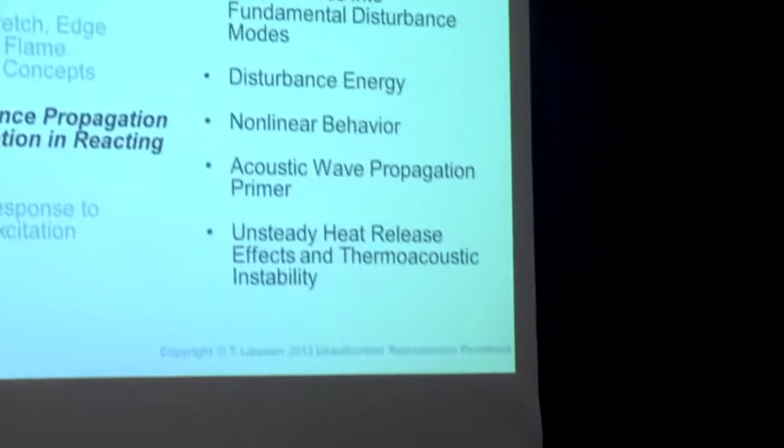But anyway, I should have put this slide up earlier. We're talking about disturbance propagation and generation in reacting flows, and then we'll finish by talking about how flames respond to these disturbances—in particular, how flames respond to harmonic disturbances.

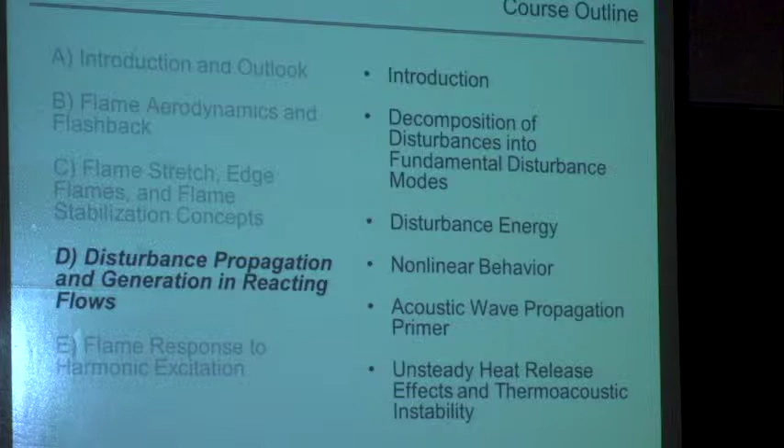This is an interesting topic because everyone here who's taken a turbulent combustion class has thought about how flames respond to disturbances. In that case, you've looked at how the time-averaged burning rate or time-averaged flame position changes when the flame is disturbed by Navier-Stokes turbulence. That's in essence the turbulent combustion problem: what's the response of the time-averaged burning rate to the amplitude of turbulence intensity.

But what I'll show you is that when you harmonically excite a flame, which is also a very important problem, the way the flame responds is quite different than if you excite it with stochastic disturbances.

In particular, some of you may remember the concept of ergodicity. If you have an ergodic time series, time averages and ensemble averages are equivalent. So if you take a time average, or repeat an experiment many times and average at a given time across trials, you get the same answer—which is true for turbulent disturbances. In contrast, when you have a harmonic disturbance, those are not ergodic, so time averages and ensemble averages aren't the same. That has significant influences on how the flame responds to harmonic disturbances.

So let's get started here, with an introduction. I'm going to motivate some of the problems we'll be looking at.

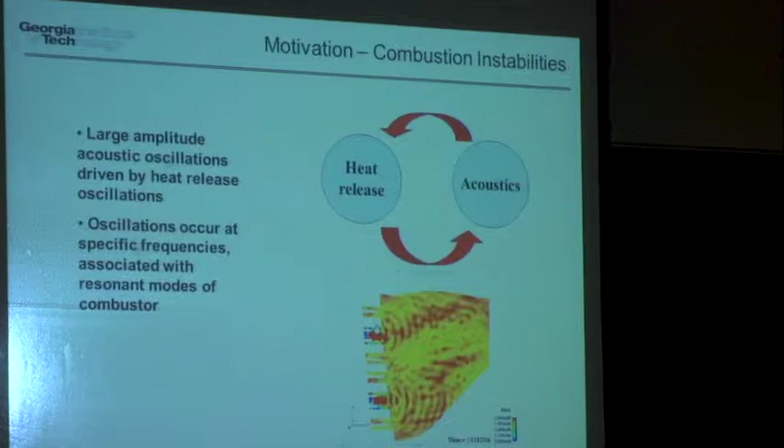One of the big motivations is the problem of thermoacoustic oscillations or combustion instabilities, illustrated schematically here. The idea is that if you take a flame, which is a source of heat release, and disturb that source, the flame responds—it doesn't just sit there. It moves around, and you get disturbances in how reactants are converted into products and so forth.

When you take that heat release and place it inside an environment which gives feedback—namely a combustor—you create the possibility to close the loop. The bottom half of this loop is always happening, and when you place the flame inside a resonator, the top happens too. You may remember on Monday I asked: what's the difference between a premixed and a non-premixed combustor?

Well, a combustor used in premixed applications is an organ pipe, whereas the combustor used for non-premixed applications is a muffler. And so the degree of this feedback changes dramatically, and that's one of the reasons why, as combustion designs have continuously evolved towards more and more pre-mixed, and you need all that air in order to get the low equivalence ratios for low NOx, what has inadvertently happened is that combustion designs have lost all their acoustic damping. They've gone from being mufflers to being organ pipes.

But what happens is this feedback loop occurs at a very specific frequency. So the feedback time scale is usually moderated by the natural acoustic time scales of the system. The flame makes sound, it propagates away, hits the end of the combustor, comes back, and then you get this feedback. So if you have a really long combustor, you'll have low frequency oscillations. If you have a really small combustor, you'll have high frequency oscillations.

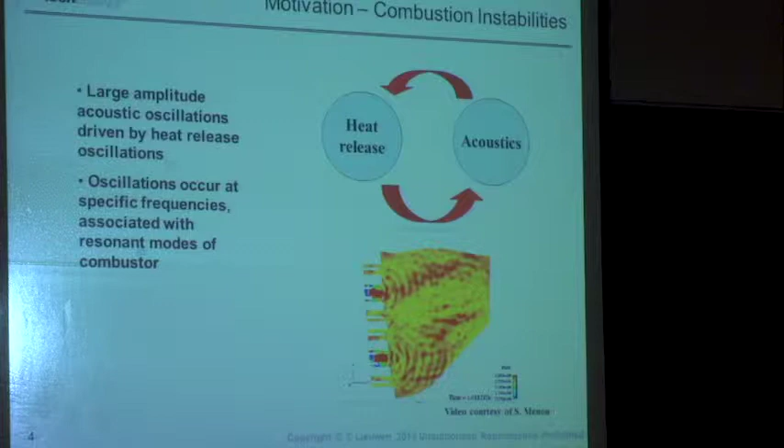For example, an application might be a really big refinery. Go to Texas, there's these massive refineries, they might be hundreds of feet long. You can have thermoacoustic oscillations of 1 hertz, which is way below what your ear can hear, but it does all these weird things to your organs, in your inner ear. Whereas if you're talking about something tiny, maybe an instant water heater, you can have thousands of hertz oscillations.

I keep forgetting I have these slides.

So this is something you can all try tonight, which is resonant modes. As I mentioned, if you have something really long, you have low frequency modes. If it's short, you have higher frequency modes. In the same way, any type of combustion system doesn't have just one acoustic mode, it has multiple acoustic modes. You can have axial modes.

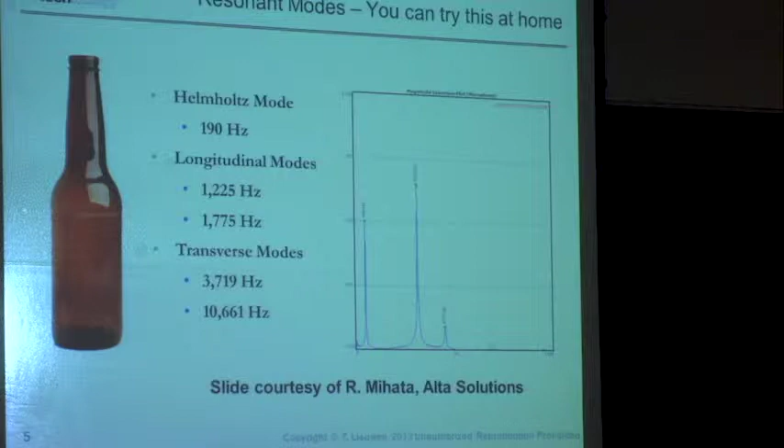You can have modes going back and forth in the axial direction. You can have modes bounce if it's a can system. If it's a round combustor, you can have modes bouncing around transversely or side to side. If it's an annular combustion chamber, so if you have a big annulus like an aircraft engine, you can have acoustic waves spinning around the annulus, or you could also have waves bouncing around radially.

So these all happen. And if you've ever blown over a milk jug or a beer bottle, you'll hear what's called the Helmholtz mode. That's the lowest frequency mode of a device that has a volume connected to a constriction. Basically, this is what's called a Helmholtz resonator, when you have a volume connected to a restriction or a neck, which is why a milk jug or a beer bottle do this.

But this is a slide that shows what happens if you actually take a Fourier transform of somebody blowing over a beer bottle. This is what you get, and this is frequency. You can see that there's these really narrow band peaks, which correspond to resonant acoustic modes of this beer bottle. You'll see one at 190 hertz, that's that Helmholtz mode. You'll see one at 1225 and 1775, these correspond to axial modes, bouncing around back and forth. Then you'll also see some pretty high frequency modes, 3700 hertz and 10,600 hertz. These are modes bouncing around side to side.

Now, the reason the transverse modes have such higher frequency than the axial modes is because this dimension, at least of a beer bottle, is shorter than that dimension. So a natural acoustic mode is roughly on the order of the amount of time it takes for an acoustic disturbance to make a round trip. A sound wave starts here, it goes there, it reflects off the open end, and it comes back. Now, if the tube is longer, it takes a longer amount of time, and the frequency is 1 over the period. Now, if the sound wave is bouncing side to side, it takes less time to bounce side to side, which is why it's a higher frequency mode.

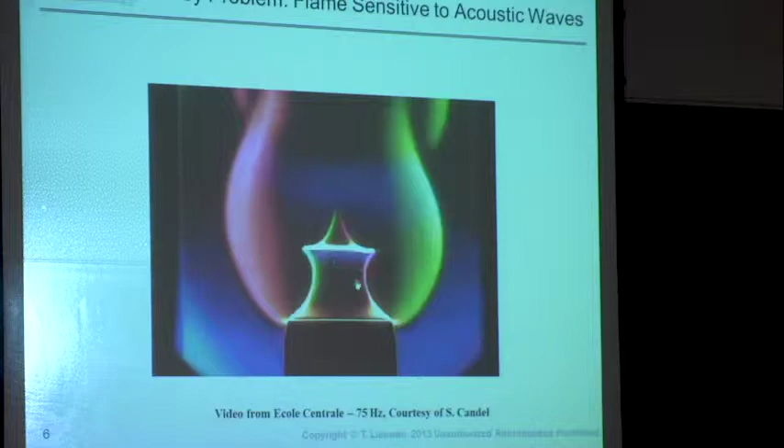Now, we'll get into this a little bit more later, but one of the key problems here, let's see if I can get this video to work. We're going to spend a whole hour talking about this issue.

One of the key issues here is that flames are sensitive to disturbances. If you disturb a flame, it will oscillate. This is a really nice video that was taken by Sébastien Candel at École Centrale. It's a super simple flame, not like anything encountered in applications, but the reason I really like this is it just shows all the physics here, minus turbulence. What you have here is a Bunsen tube, okay? So this is just a simple Bunsen flame.

If there weren't any oscillations, here's your Bunsen tube. You just see a nice little Bunsen flame, like we were talking about when we talked about stretch flames. That's what you'd see.

What they did was they took a speaker and put a T on the bottom and generated modulations, so that the reactant flow rate coming out of the tube is not constant. It's oscillating in time, so you have a modulation in the reactant flow rate into the system.

What you're looking at here is a Schlieren image. This edge right here, Schlieren is sensitive to density contrast. So you've got reactants here and products on the other side of the flame. You see the sharp gradient, associated with the temperature jump across the flame.

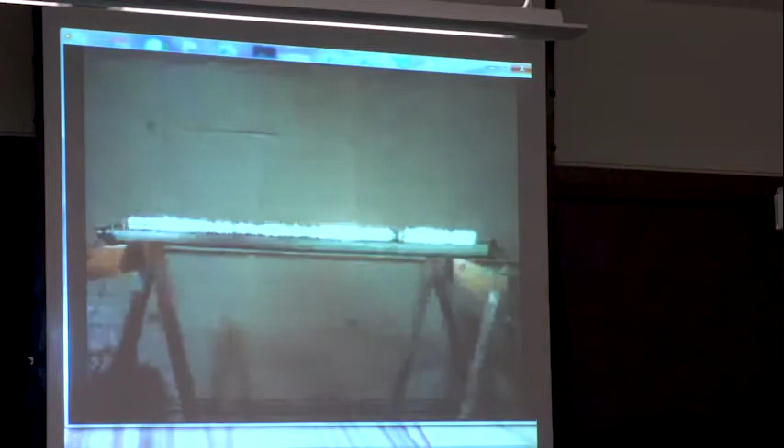It isn't terribly energetic, so let's try something a little more energetic. I've never been able to figure out what's happening over here. Now that's some good physics. I'm going to turn off the gas. All right, anyway, that is called a Rubens tube.

Okay, cool. Okay, so that's a Rubens tube. Actually, let me just show you one more video while we're on a roll. It turns out that combustion, or these combustion instabilities, is part of a broader phenomenon in physics called thermoacoustics. The basic idea is that when you have sound interacting with temperature gradients, you can have spontaneous sound generation. So for example, when you have a cryogenic piping system with really abrupt temperature gradients, imagine you have a packet of fluid.

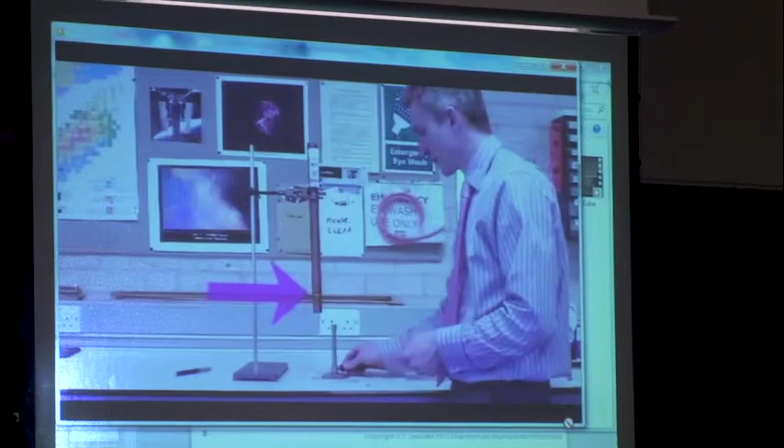This is a Rijke Tube, and it's one of my favourite physics demonstrations. At the point marked in the tube, there's a small metal gauze. The demonstration involves heating the gauze with a Bunsen for a few seconds. When the Bunsen is removed...

Okay, so just to get you oriented, this is a piece of pipe. It's open on one end, open on the other. So he just took a piece of copper pipe, and what he wants to do is make it hot about a quarter of the way up.

The way he's going to make it hot is he put in a really fine piece of metal mesh, and when he puts the Bunsen flame underneath it, it's going to heat that metal mesh up. So when he removes the Bunsen flame, he'll have an open piece of pipe with something hot right there.

Okay, so there's a strong temperature gradient, so there's going to be a convection current. As you can imagine, it's cold down here, hot up here, so there's this big temperature gradient. But there's no combustion in this experiment. As soon as he removes the Bunsen flame, the combustion's gone, it's just used as a heat source.

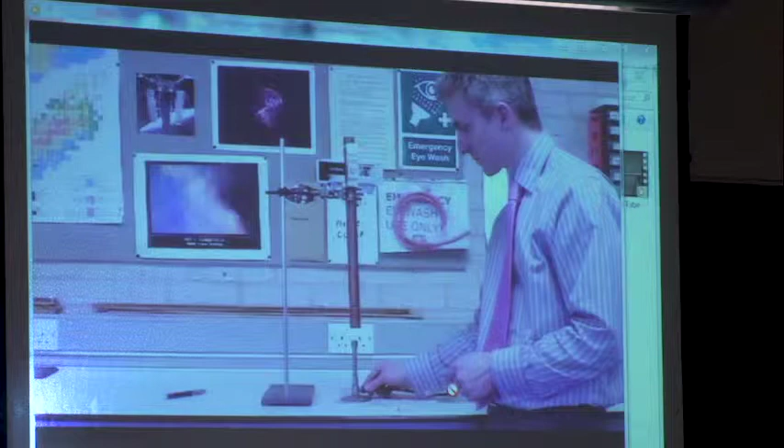If you go to YouTube and look up Rijke Tube, you'll see examples where people use electrical heating or something like that. But anyway, once removed, the tube sings at its resonant frequency.

The resonance does not occur if the tube is tipped on its side, but it does return if the tube is placed back vertical. The resonance also does not occur if the tube is placed upside down.

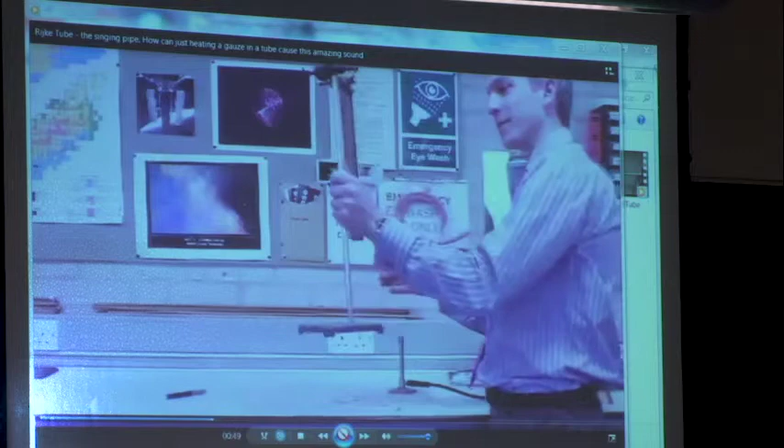The explanation as to how it makes the sound encompasses a wide variety of physics. The tube was invented by the Dutch physicist Petrus Rijke, who died at the end of the 19th century. If you want to try and puzzle out how it makes a sound, then pause the video now.

The Bunsen burner heats up the gauze fairly quickly, which becomes red hot. A convection current of warm air rises up the tube to begin with, but it will soon subside once the Bunsen is removed. Air in the vicinity of the red gauze has heated up. Note that the centre of the tube is above the position of the gauze. The region of hot air causes the pressure to increase at this point, which forces air out of both ends of the tube. This is essentially a longitudinal pressure wave.

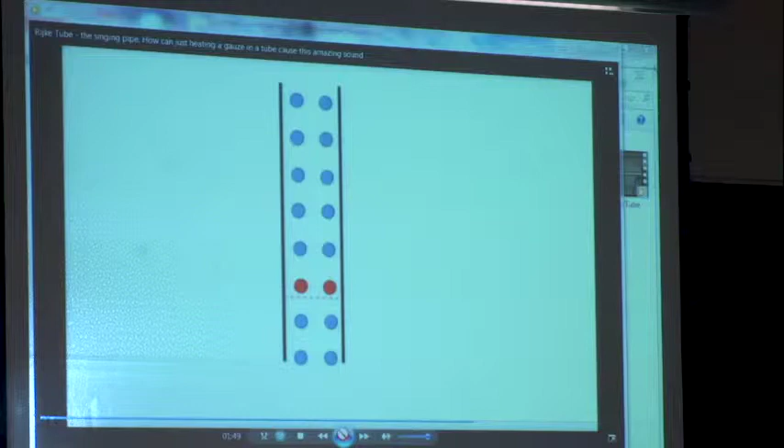When it reaches the open ends of the tube, it partially reflects back inside the tube. Now colder air has moved upwards past the red-hot gauze. This air is colder because it's been below the gauze, and hot air tends to rise due to convection. The air particles that have just risen past the hot gauze are heated, and so the pressure rises again. This provides the driving force for the resonance. The air is forced out of the tube once more, and then it reflects, and so the cycle repeats.

Note, of course, that this animation is rather simplified. I'll just stop that there, but that gives you the idea. So it's pretty wild stuff. You just take a tube, make it hot a quarter of the way up, and the thing will just oscillate on its own. It's self-excited. You get a spontaneous oscillation.

Okay, so that kind of sets it up, and I'll just note that this issue, combustion instabilities, is a significant problem in practical combustion devices. Many of you are going to get your PhDs working on this problem. I've worked on it quite a bit, Professor Yetter's worked on it quite a bit, lots of people have worked on it.

A lot of the initial work was actually done here at Princeton. Like I said, it's basically you're taking a flame that's sensitive to disturbances and putting it inside of a resonator. So pretty much any kind of high performance propulsion system or most modern low emission systems, you deal with instabilities one way or another.

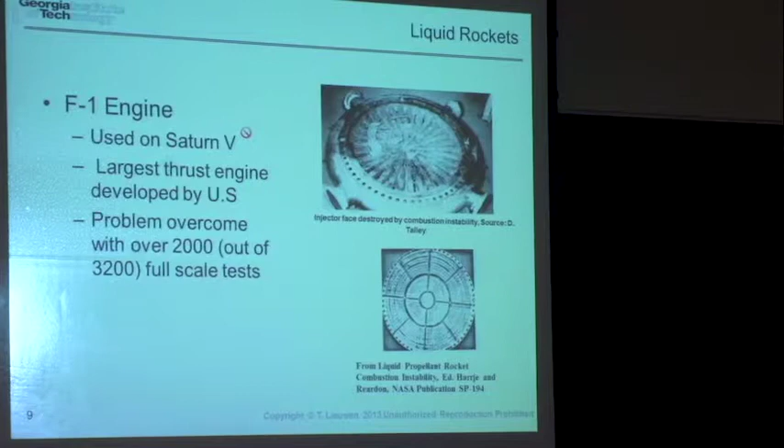For example, the F1 engine, which was the largest thrust engine the US ever flew, was used on the Saturn V, a big engine, and it had enormous combustion instability problems. They did 3,200 full-scale tests on that thing, and over 2,000 of those were basically trial and error tests where they were monkeying around with fuel injector patterns or adding baffles or things like that to eliminate oscillations.

So this is an example of what I mean by baffles, from this reference. What you have is the injector plate of a rocket is just a really fancy shower head, right? It's a shower head that blows out oxygen and some fuel. And so the flame is going to be sitting some distance off that injector face.

But what happens is when you have these acoustic instabilities, in many cases in rockets, they're transverse oscillations. So they're going side to side, and they're modulating how the fuel and the oxidizer are mixing. They're modulating the flame. And so the idea is you'd like to keep these acoustic oscillations away from that critical near-injector region.

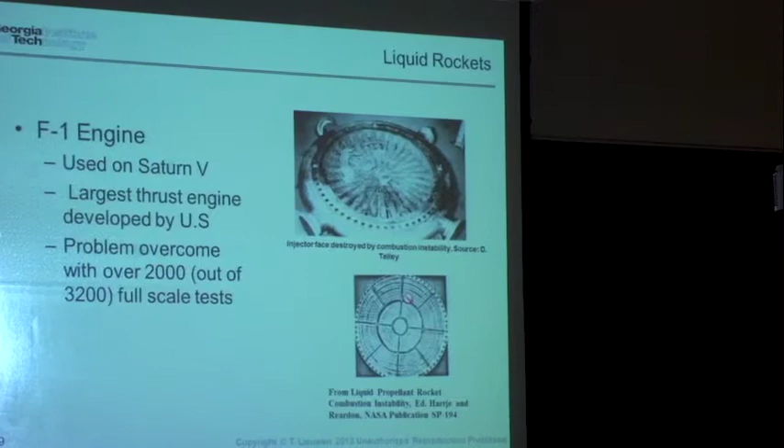So they simply would put these things you're seeing here to intrude into the flow. They might stick out this far, it's a little hard to visualize. Just think of a flat plate with all these holes in it, and wherever you see this stuff, it's sticking out into the flow a couple inches. What that does is disrupt the acoustic motions near the injector face. As you might imagine, these things like to burn off, so they only have a certain amount of life on them.

This is just a couple other examples, and I'll skip over that. But anyway, that kind of sets up some of the things that we're going to talk about for the rest of the day.

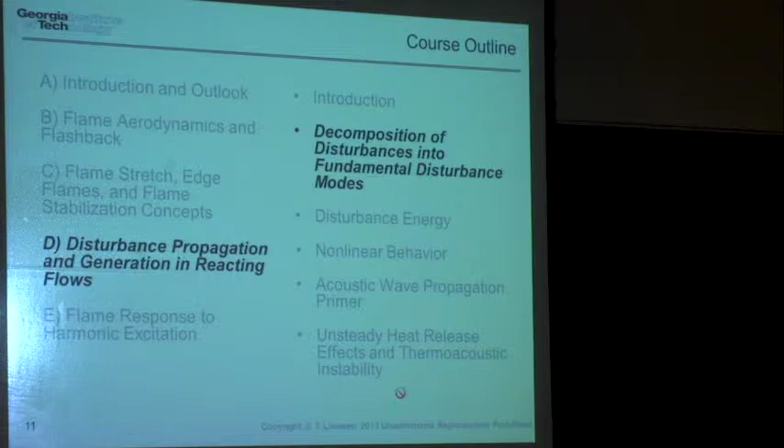All right, now I want to move into a more theoretical topic, now that I've hopefully woken you all up. I want to talk about decomposition of disturbances into fundamental disturbance modes. I have a lot more material in these slides than I have time to present, so don't get stressed out if I'm jumping over stuff. I decided to put extra stuff in here in case someone had a question, so I could go into more detail on it.

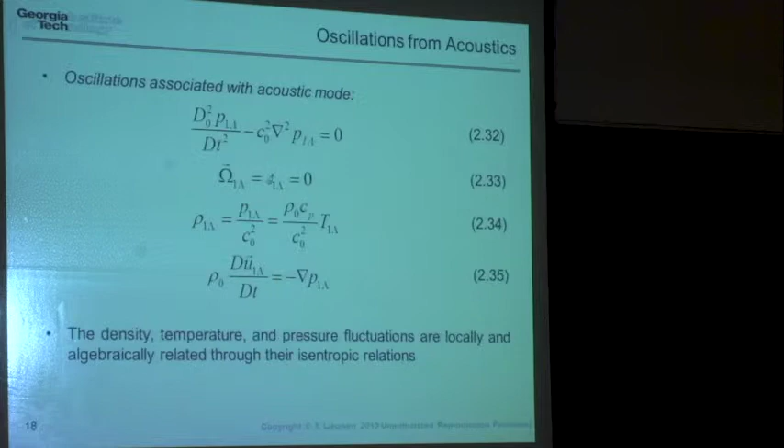The basic idea is, you don't need to do this, so I'm going to jump ahead. Don't jump ahead, I'm adding a slide. I'm adding a new slide here on the fly. Where'd that slide go? And I'm going to stick in a box. Whoops. Don't let me hit save. Okay.

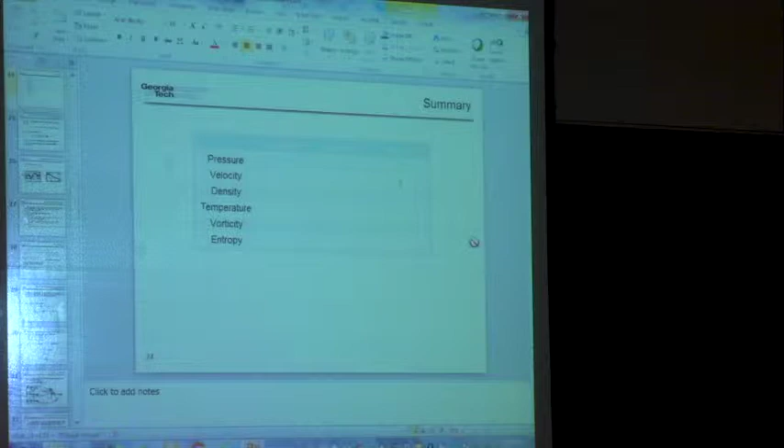What I'm going to show you is that when you're making measurements or doing a calculation, you have these physical variables. Some of them are thermodynamic, some are fluid mechanics. For example, you have pressure, velocity, density, temperature, and then maybe these slightly more—well, vorticity is pretty obvious what vorticity is. Entropy is a little more fuzzy in terms of what you would measure. But anyway, you have these quantities.

What I want to show you here is that when you have disturbances in these quantities, all this stuff is going to be oscillating. These are all manifestations of three fundamental canonical disturbance modes, which I'm going to call the entropy mode, the acoustic mode, and the vortical mode.

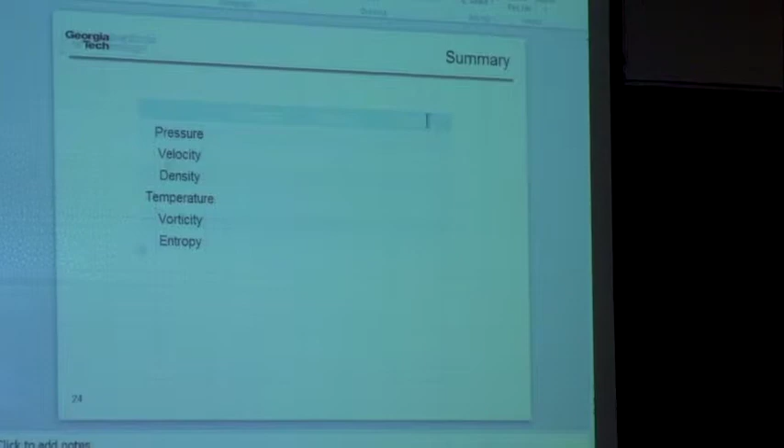Imagine I have these three fundamental disturbance modes, which you can't actually see, or it might be very difficult to directly measure, but I can measure their manifestations. So in other words, the pressure, velocity, density, temperature, vorticity and entropy are actually manifestations of, more fundamentally, an acoustic disturbance, an entropy disturbance, and a vorticity disturbance. That's basically what I'm going to talk about for the next 20 minutes, this canonical decomposition.

You might say, well, this stuff is really intuitive and I understand it, and this is how the Navier-Stokes equations and the energy equation is framed. Why do you got to do this to me? And the reason is that, in fact, it lends a whole lot of insight.

I'm going to show you an example from real data, measurements in an unstable combustor, where if you're just looking at the data, you have no idea what's going on. But once you look at it again, you'll say, oh, hold on. I'm going to show you velocity data, and what I'm actually measuring is the superposition of an acoustic disturbance and a vortical disturbance. So what I'm measuring is the velocity, but what's really happening is I have an acoustic and a vortical disturbance superimposed. Once you see that, the blinders come off, and it's super obvious what's happening.

So let me hit Control Z. So that's just kind of me telling you what I'm going to say, and now I'm going to say it, okay? And then I'll tell you what I said.

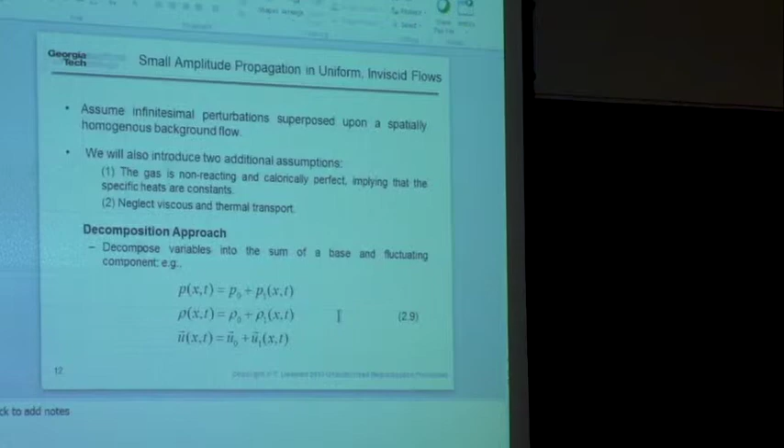So in order to introduce this concept, I'm going to make a bunch of assumptions initially to get things started, and then I'll talk about what happens when we relax those assumptions. The first major assumption is I want to think about what happens when I have very small amplitude disturbances in a uniform inviscid flow.

Why do I want small amplitude disturbances? Because I want to linearize the Navier-Stokes and the energy equation, to get rid of all those nasty nonlinear terms. Uniform inviscid flows, I'll explain what that means a little bit later.

So what I'm going to do is assume I have a homogeneous background flow. By homogeneous, I mean spatially uniform density, spatially uniform velocity, spatially uniform temperature, spatially uniform pressure. Then I want to look at how disturbances in pressure, velocity, density, temperature propagate along that background.

You might say, well, hold on, we're doing combustion here. Why is it at all interesting to think about what happens when you have spatially uniform density? What I'll tell you is that where you have changes in density, that introduces some new effects. But I'll get to that later. Just bear with me.

So what we're going to do then is take every variable and decompose it into a sum of a base and a fluctuating component. How many of you have done linearization, are familiar with linearization of the equations?

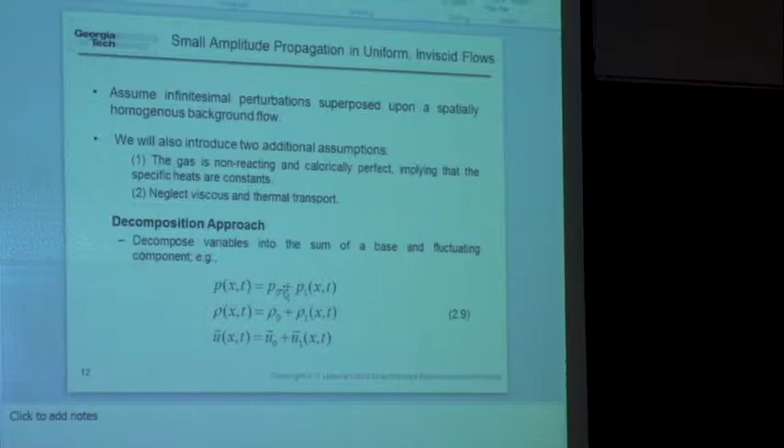Okay, I'm just going to go really fast then. So for example, the pressure, it's a function of space and time, and it's going to equal P naught, so that's the base state. Notice P naught is not a function of x by assumption, because I said I'm going to assume uniform. When I relax this assumption later, you'll see what happens.

Plus a disturbance, so the naught denotes sort of the nominal field. The subscript 1 denotes a small amplitude disturbance. Therefore, by assumption, P1 is going to be much, much less than P naught because I want to linearize. The density, same thing, rho naught plus rho 1, the velocity U naught plus U1, et cetera, et cetera.

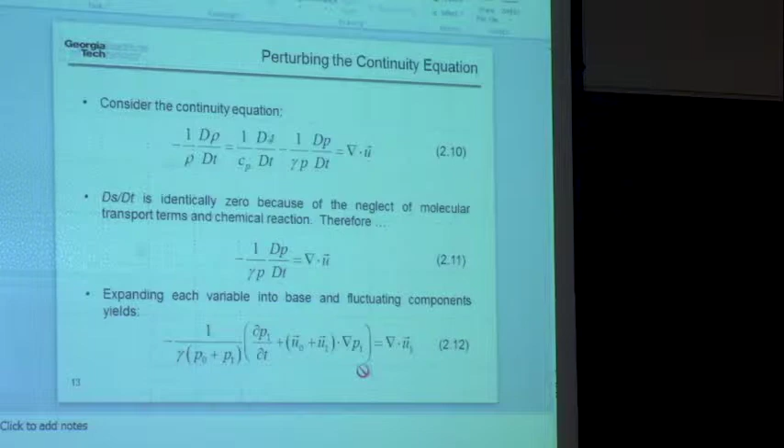Then what I'm going to do is just jump over these next slides, and you can just take my word for it.

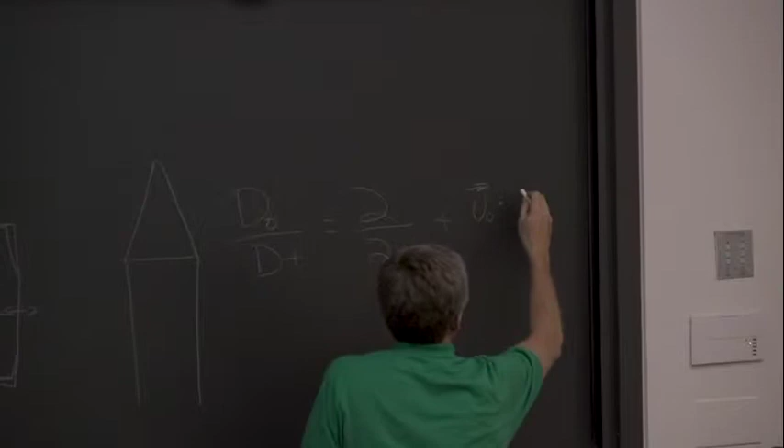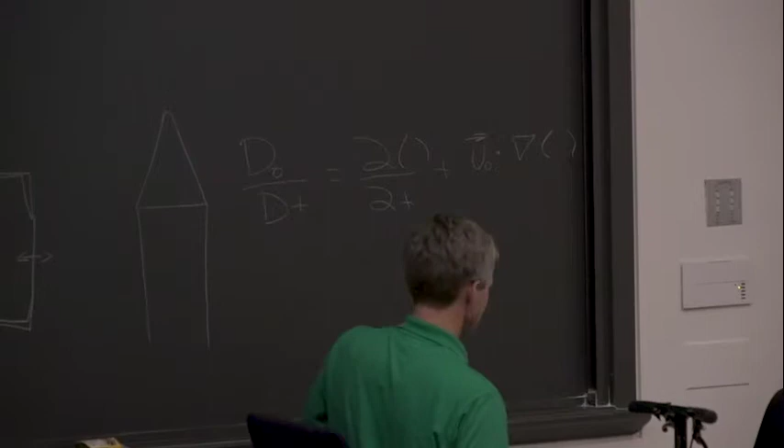So it's the substantial derivative, but it's not u dot grad. It's d by dt plus u naught dot grad. So it's the convection. It describes the time derivative moving in a frame of the nominal mean velocity u naught. So d naught by dt of omega 1 - omega is the vorticity, by the way, I can't remember if I defined that. So it says if I'm moving at a speed of u naught, what's happening to the unsteady vorticity? So omega is the vorticity, the subscript 1 is the disturbance.

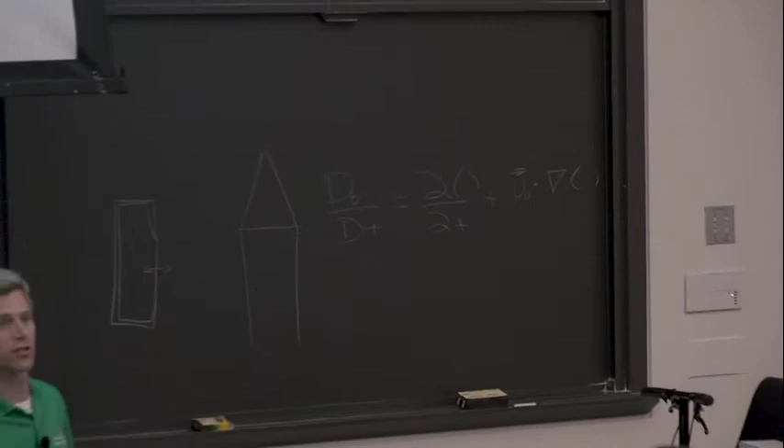So with that as a background, what is this equation physically saying? Well, I just sort of just said it.

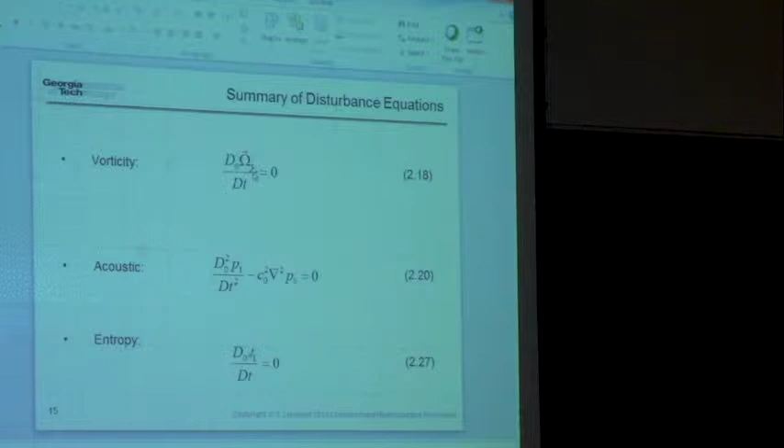It says if I'm moving with the average flow, there is no change in vorticity, right? So if I have an Eulerian reference point and I'm sitting there, the vorticity could be oscillating - I could see oscillations in vorticity, basically little vortices convecting past me. But if I'm moving with the flow, those vortices are frozen. And so in other words, I don't have stretching and bending terms or diffusion terms - I've neglected all of those by the assumption. So it says that in a reference frame moving with the velocity, the vorticity disturbance is constant. What it also says, though, is that these vortical disturbances move with the flow.

All right, entropy equation. Let's just jump down there. This says the same thing with respect to the entropy. So if I'm moving with the flow and I had an entropy probe, I would measure constant entropy - it wouldn't be changing in time. Whereas if I was at a fixed point and I had my entropy probe, I could potentially see oscillations in entropy. And then this equation right here.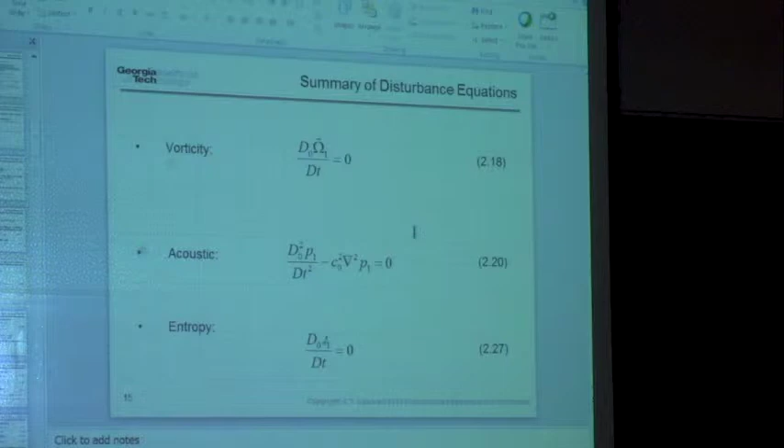How many of you have seen the wave equation before? Okay, so you'll recognize this. It looks like a wave equation, but there's this substantial derivative. This is what's called the convective wave equation. It's the wave equation in the presence of mean flow. If there was no average flow, this would just be partial squared of P1 by partial squared of time squared.

It turns out if the Mach number is low, the convection terms don't matter. So you can see the acoustic disturbance is totally different - vorticity and entropy satisfy the same kind of equation, but the acoustics is a different equation. This one is first order in time, first order in space. This one is second order in space, second order in time, and this describes wave propagation.

Okay, so that's just kind of a quick summary - the Navier-Stokes and energy equation naturally like to arrange themselves in this way. It's a nice simple way to do it.

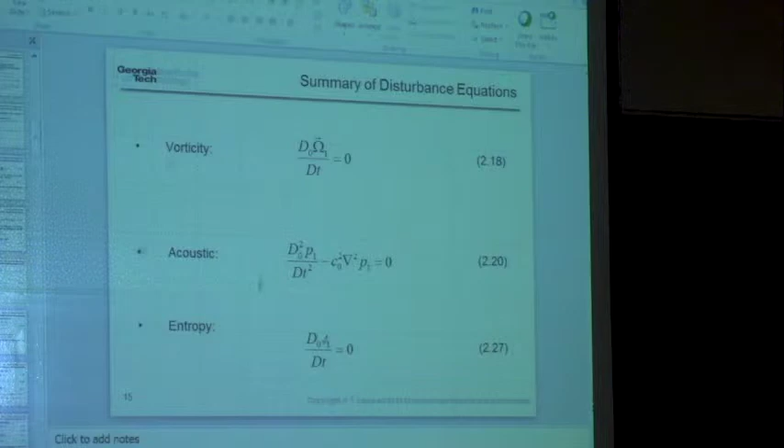Now what I want to do is I want to say, let's take all these observables - pressure, velocity, density - and in fact, I don't like the way I did my notes, so do me a favor and write something a little different, because thinking about the canonical decomposition of the entropy and vorticity is a little bit confusing at first. So write rho 1, P1, T1, U1, okay?

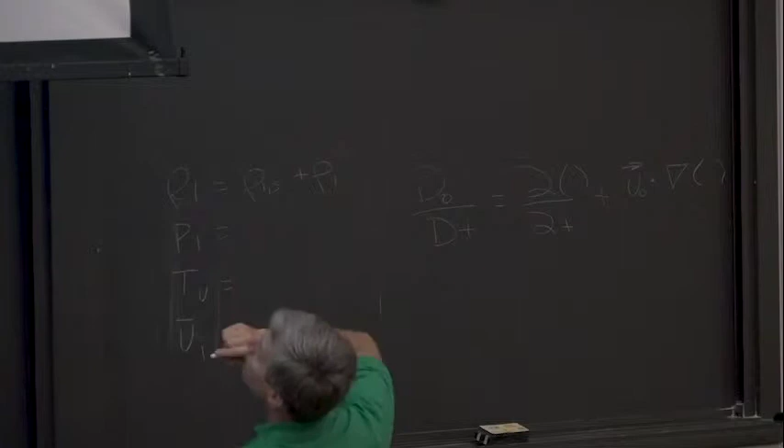What I'm going to do now, sort of motivated by this idea, is say let's assume that the density fluctuation is itself composed of a superposition of these three canonical modes. So I'm going to say rho 1 S plus rho 1 A plus rho 1 omega. In other words, I'm going back - I am going to assume I have these canonical disturbances, which I don't have access to, which I may not be able to directly see: vorticity, entropy, and acoustic. But the density fluctuation is the superposition of those. Same with the pressure, and you can just write this out, etc.

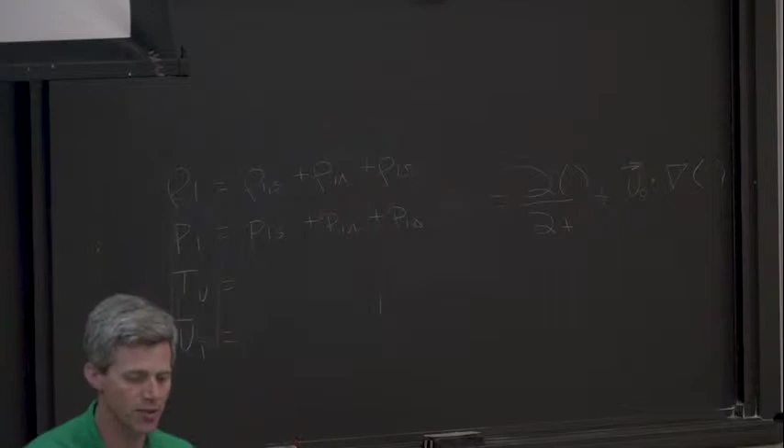And it turns out you could say the same thing about the vorticity and about the entropy - that it's a superposition of the modes. But this is a little bit more, if you're not used to this concept, harder to get your arm around. I'll come back to that in a minute. So for example, P1 omega - this is the pressure fluctuations induced by the vorticity mode. Or rho 1 S - that's the density fluctuation induced by the entropy mode. That's the physical meaning of that.

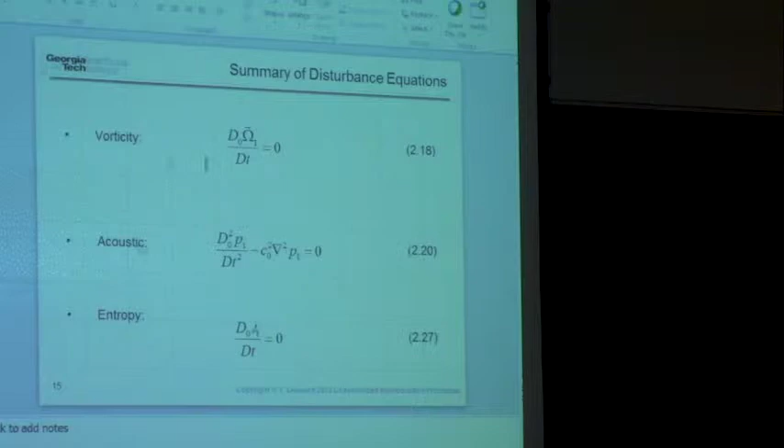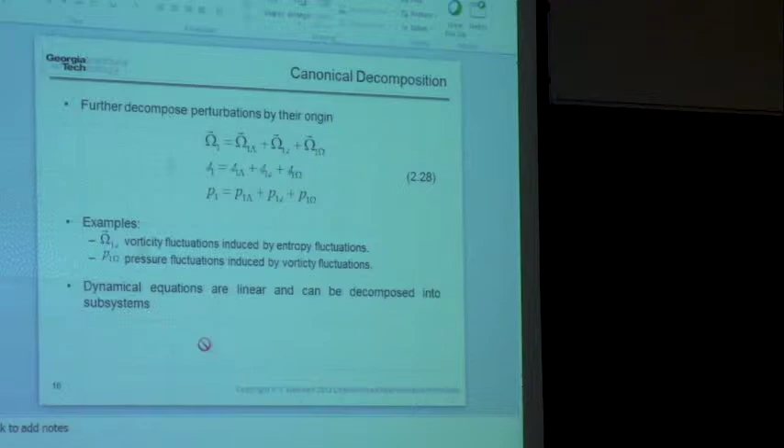Now, because these equations are linear, I can just take these substitutions and drop them into those equations, or into any of the other linearized equations that I jumped over - the linearized continuity, momentum, and energy equation. And I can decompose them into subsystems for each set of equations. I'm going to skip over all the details, and I'm just going to give you the answer.

All of this comes straight out of a classic paper by B.T. Chu and Leslie Kovasznay, who were trying to make sense of measurements in a supersonic flow, which is where this idea came from. I have the references in my book, chapter 2, where I go into more detail. But here I'm just going to give you the answer: I have this vorticity mode, how does it manifest in these observables?

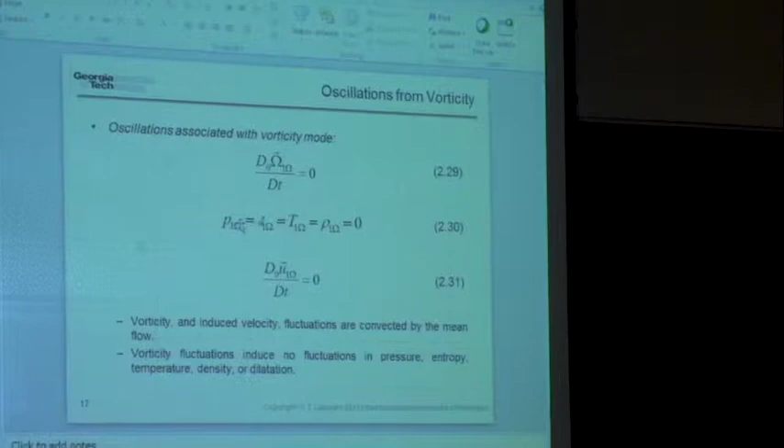Let's start down here. So P1 omega equals 0. What does that mean physically? Somebody tell me what that means physically.

So the vorticity mode induces no pressure fluctuation, no entropy fluctuation, no temperature fluctuation, no density fluctuation. Basically, this is saying that the vorticity mode, to first order, is not modulating your thermodynamic variables. It's an incompressible disturbance, and it's not going to be changing your entropy, temperature, or density. But what it does do is manifest itself in oscillations in the velocity. So vorticity and the induced velocity fluctuations are convected by the mean flow, but they induce no fluctuations in pressure, entropy, temperature, density, or dilatation.

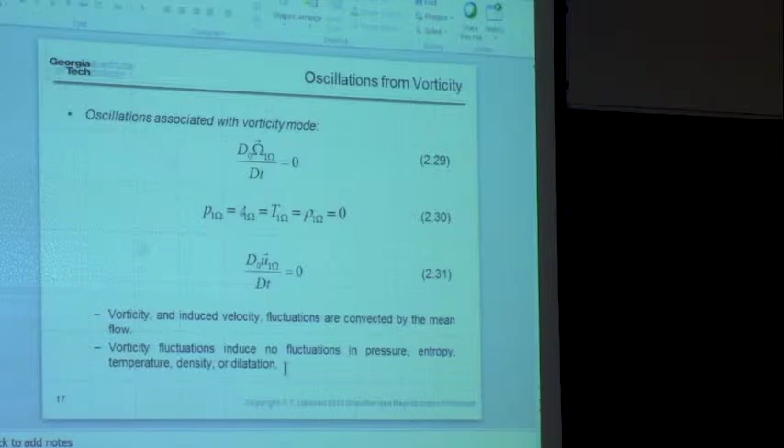Actually, I didn't have an equation for dilatation. By dilatation, I mean del dot V. So del dot U1 is 0. Del cross U1 is non-zero for the vorticity mode. So it's rotational but incompressible.

Now let me ask you a quick question. This is an experiment you can all do. In fact, there's a ton of experiments in the literature where people generate a vortex, put a microphone in its path, and measure a pressure fluctuation. People have even suggested you can use this as a method for flow diagnostics, using the pressure fluctuation. But this equation says there's no pressure fluctuation induced by a vortex. So how do I reconcile those two observations?

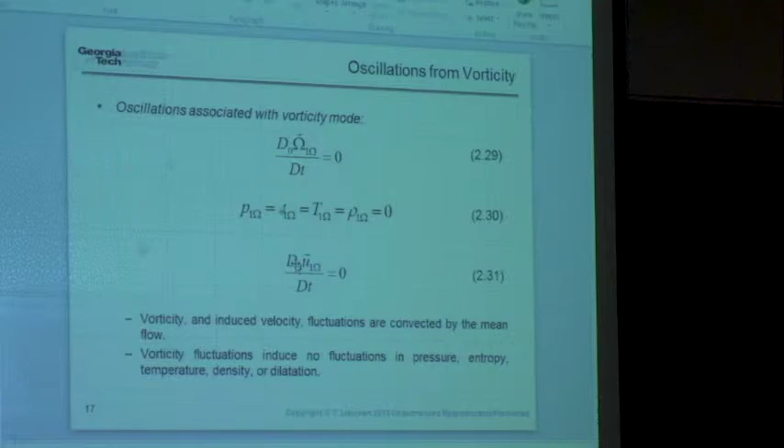Well, in general, you're right. But what this equation says is P1 omega is 0 — there is no fluctuation in pressure, even as the velocity is oscillating. This is a fluctuation, keep thinking, what's going on? What this says is the vorticity oscillation generates no pressure fluctuation. But it does — so that's why I'm asking why. What's going on? Reconcile the two for me.

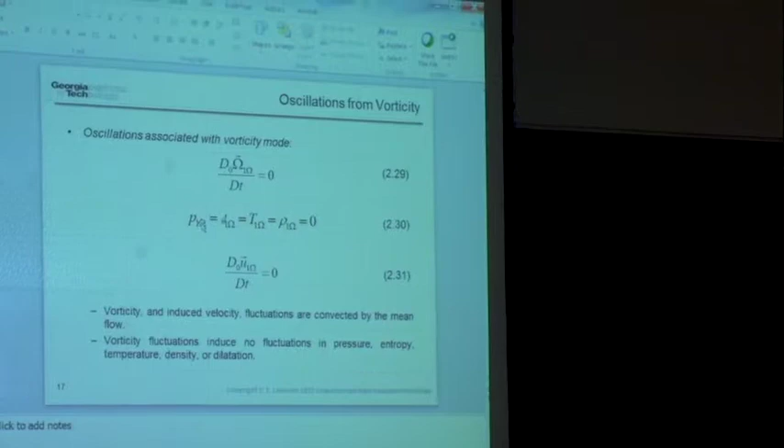But you're on the right track. What else have I neglected? I'm making simplifications — what was that? Yeah? So what have I done, what have I neglected? I assumed linearity, okay? So vortical disturbances excite pressure fluctuations at second order.

So think about the Navier-Stokes equations — you've got that whole convection term, which gives you turbulence, right? That's a second order term. So you're right, vorticity does excite pressure, but what that means is if I have a vortical disturbance of amplitude epsilon, the pressure disturbance is of order epsilon squared. So if I'm neglecting order epsilon squared terms, they don't show up in a linear analysis. So that's the answer to that.

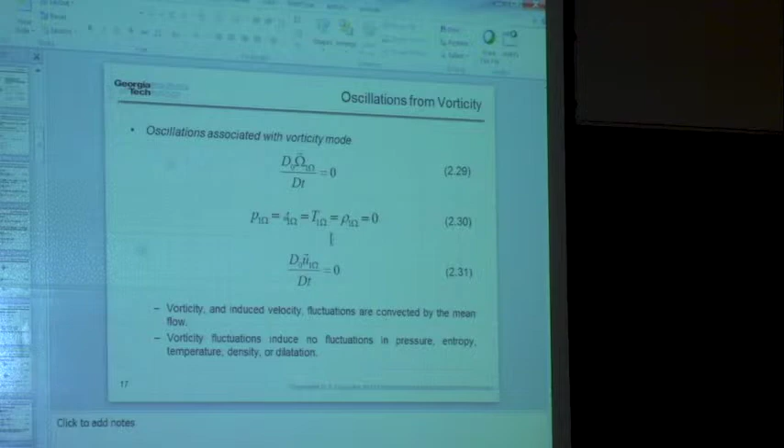So keep that straight, it's important. The same thing is going to happen with these other disturbances. So the assumption of linearity is key here. Okay, so that's the vorticity mode.

Let's go back to my assumptions. I have a uniform background flow, and I introduce a sound wave, a small amplitude sound wave, and it goes zinging by. What this says is that sound wave is not going to excite any vorticity, and it's not going to excite any entropy. Now, let's jump down to this one.

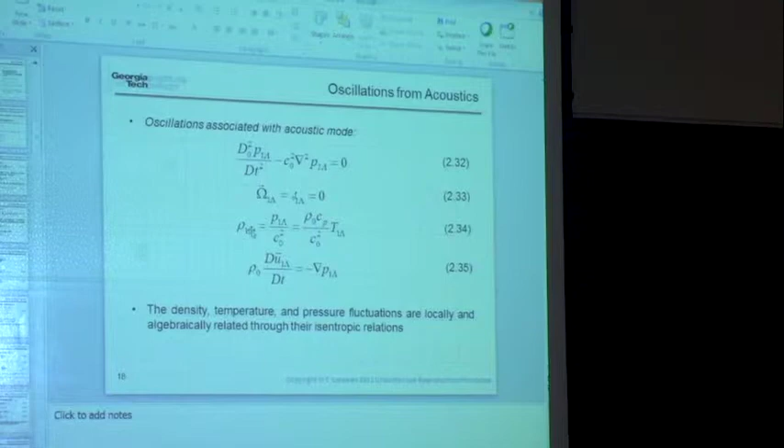It says that the density, the pressure, and the temperature are locally and algebraically related through their isentropic relationships. You're probably used to seeing the full nonlinear form of isentropic relations, like pressure equals a constant times rho to the gamma. But if you linearize that, assuming pressure and density disturbances are small, you end up with this: the density fluctuation associated with the acoustic mode equals the pressure fluctuation divided by c squared, and the same for temperature. Locally and algebraically related means if I know the pressure at a given point, I also know the temperature through these algebraic relationships.

The reason I emphasize that is because it's not so for the velocity. This is my equation that relates velocity and pressure. The substantial derivative of the velocity is equal to the negative of the gradient of the pressure. This comes straight out of the momentum equation. What this tells me is that the time variation of velocity in a coordinate system moving with the flow equals the pressure gradient. So velocity and pressure are not algebraically related or even locally related. Rather, this is the acceleration, and the acceleration is related to the pressure gradient.

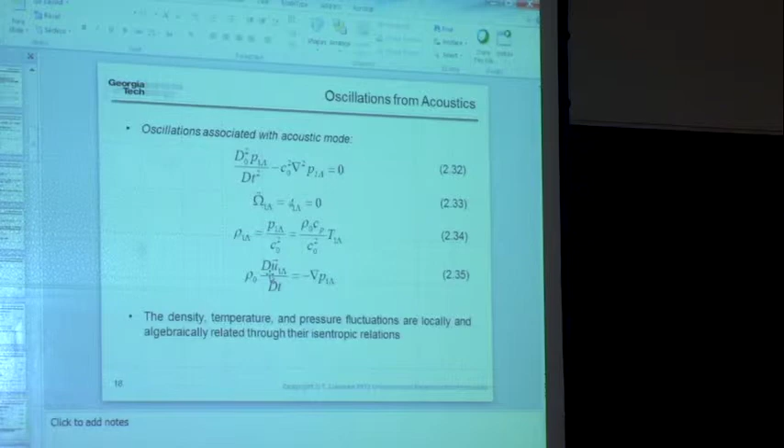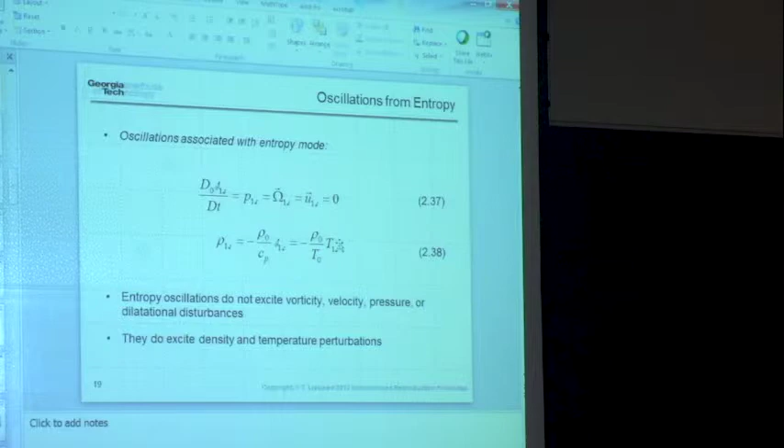So that is the acoustic mode. And then the entropy mode looks like this: P1s equals omega 1s equals U1s. So that says the entropy disturbance excites no fluctuation in pressure, vorticity, or velocity, but the density, the entropy, and the temperature are oscillating due to the entropy mode.

So let's summarize, make a couple comments here, and we'll come back to this because I know I'm feeding you from the fire hose. What this says is that in a homogeneous uniform flow, these three disturbance modes propagate independently in the linear approximation. For example, if I have a uniform flow and an infinitesimal vortex generator and an infinitesimal acoustic generator, and I launch two disturbances going in the same direction, they're going to move at different speeds. The vortex moves with the flow, the sound wave moves at the speed of sound.

But what it says is they don't interact with each other. They don't modulate each other or distort each other. They're like two ships passing in the night, both doing their own thing. It also means, by the same logic, that if I just excited a vortical disturbance, this convecting vorticity, it doesn't cause any fluctuations in acoustics or any fluctuations in entropy. The same applies for any one of those three.

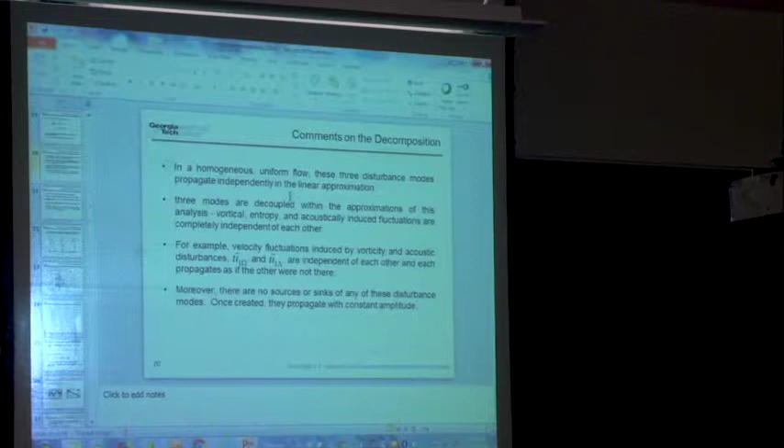So that moves me to the second bullet, which is just a restatement: these three modes are decoupled within the approximations of this analysis. Let's quickly summarize those approximations: linear, spatially homogeneous, no molecular transport. Those are the three major assumptions I've made. If I drop any one of those three, things start to change a little bit. Spatially homogeneous means no variations in mean quantities.

And this says what I just said: for example, velocity fluctuations induced by a vortical disturbance. We said vortical disturbances cause the flow to oscillate, and acoustic disturbances cause the flow to oscillate. But those velocity disturbances are actually independent of each other, and one acts as if the other wasn't there. So when you take a hot wire probe or PIV, you're measuring the overall fluctuating velocity. But within the linear approximation, there are actually two canonical sources of those velocity fluctuations, totally independent of each other, each doing their own thing, and you're measuring the superposition of those.

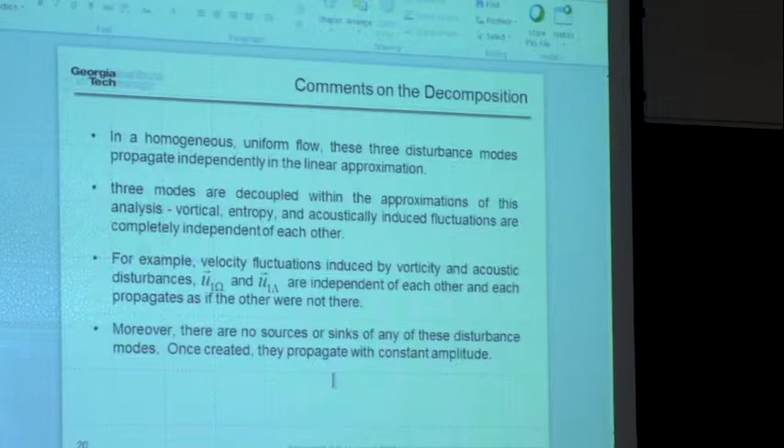Finally, what this says is that there are no sources or sinks of these disturbance modes. Going back to those equations before, we had a convection equation equals 0, a wave equation equals 0, and a convection equation equals 0. We haven't talked about how you create these disturbances yet, but once they're created, they just propagate with constant amplitude—they don't increase or decrease. Again, I want to emphasize this is within the approximations of this analysis: linear, spatially homogeneous, no molecular transport.

Okay, let's make a few other comments.

Acoustic disturbances propagate at the speed of sound. Sometimes you'll hear these called vorticity wave or entropy wave and acoustic wave. In reality, only the acoustic disturbance is a true wave, what I would call a true wave.

The vorticity and the entropy disturbances are not waves. What's my definition of wave? I would define a wave as a disturbance that propagates energy without propagation of mass. That's kind of my informal definition.

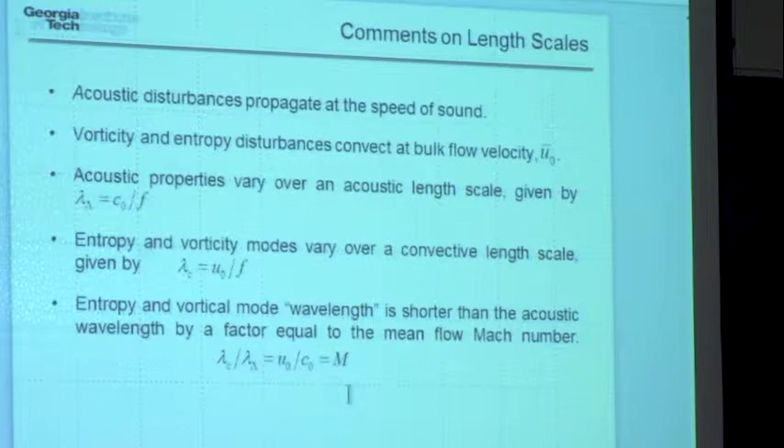For example, when I'm talking, there's energy that's propagating from my mouth to your ear. I'm not standing up and running over to you, moving air particles and putting them in front of your ear. It's the same as when you play pool. If I put a whole bunch of billiard balls in a row, you hit the first ball, the last ball moves. But this ball didn't have to go all the way over there. So I didn't have to convect the mass over there to propagate the energy.

So that's what acoustic waves do. Energy is propagating without the mass actually moving. The same thing with ocean waves, when you have this big wave moving along, it's not that the water is moving necessarily with it, it's rather the disturbance that's moving. In contrast, an entropy disturbance and a vortical disturbance, the energy is being propagated by the convection of mass. That's what's causing the energy to move.

Okay, so let's think for a minute here about these two different velocity scales. One's moving with the speed of sound, the other is moving with the flow. So let's think about length scales for a minute.

Let's suppose I have a magic disturbance generator right here, and let's suppose that it's a vortex generator. Every time interval apart, capital T, I'm going to pulse my vortex generator and generate an infinitesimal vortex. So what's going to happen is I generate this vortex, it convects a distance u0 times T, then I'll generate another one, and a time T later I'll have two vortices. The distance between these two will be u0 times T.

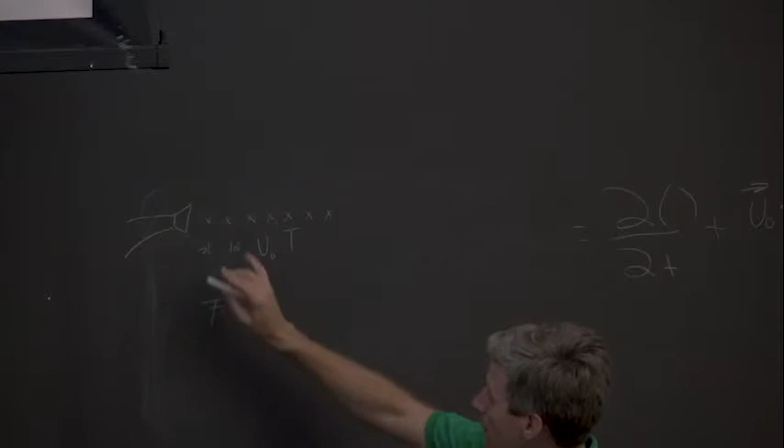And I can do this a thousand times, and then I'd have a thousand little vortices, this little wave train that was periodic. So I can think about a, quote, wavelength of this vortical disturbance, which would be u0 times T. Now let's suppose I was modulating this thing harmonically at a frequency f. T is equal to 1 over f, where f is the frequency. So what that means is I can define a convective wavelength, lambda c, equal to u0 divided by f.

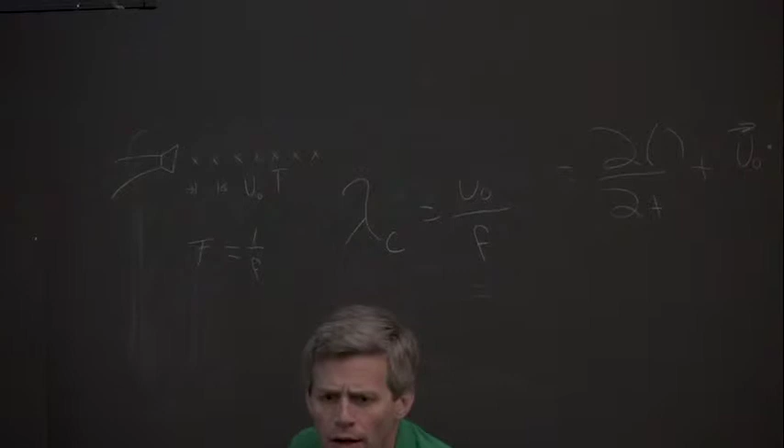Yeah, so lambda is the wavelength, or in this case, the wavelength is the distance over which the disturbance repeats itself. The c denotes convective, and it's u0 divided by f.

Now same thing, let's think about this as a sound generator. It's generating a sound wave every t time apart. Well, that sound wave, let's suppose it's a low Mach number, let's suppose the Mach number is 0.1. That sound wave is moving 10 times faster than the vortical disturbance is. So let me make circles to denote 1, 2, 3, 4, 5, 6, 7, 8, 9, 10.

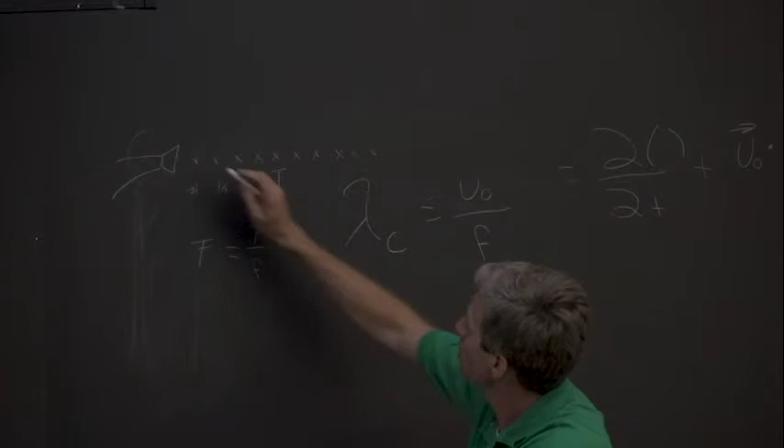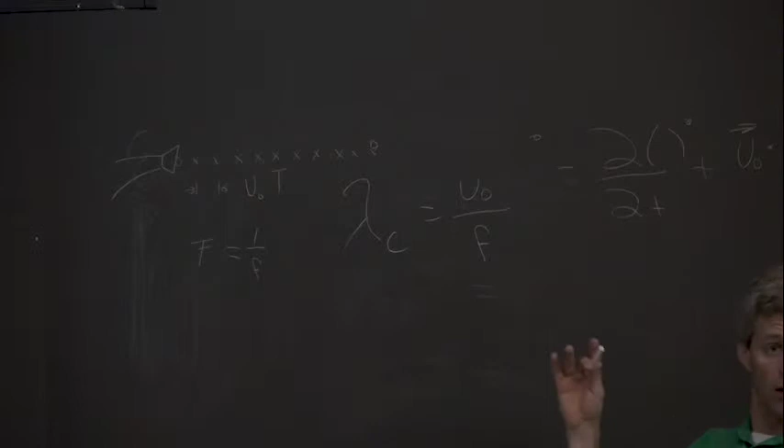So I generate a sound wave. In a time t, that sound wave will have moved this far. The next time t it will have moved that far, then that far. So what's the observation? The length scale over which the acoustic disturbance moves is a lot longer than the vortical disturbance. So the acoustic wavelength, which I've called this, is going to equal C naught divided by F. That's a formula you've probably seen before.

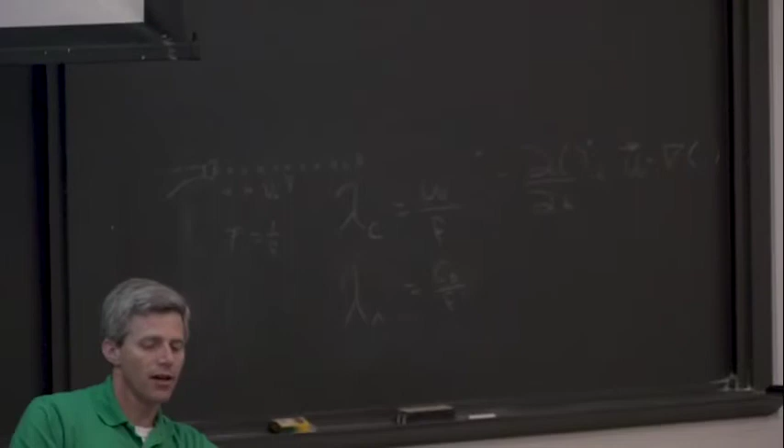So what that means is, let's suppose I have a combustion instability occurring at a frequency of 100 hertz. What that's going to do, as I'll talk about later, is excite acoustic disturbances, vortical disturbances, and entropy disturbances, and they're all occurring at 100 hertz. But what's the length scale over which these disturbances are happening? Well, that's given by those two equations.

And what you can see is, if I take the ratio, lambda of the convective disturbance over the acoustic disturbance, that's U naught over C naught, which is the Mach number. So in other words, if the Mach number is 0.1, the acoustic length scale is going to be 10 times longer than the vortical or entropy length scale.

That's important to keep in mind when thinking about how flames respond to disturbances: vortical and entropy disturbance length scales are a lot shorter than the acoustic length scale. A very important assumption is the acoustic compactness assumption: when the flame is short or small relative to the acoustic wavelength, that's called an acoustically compact flame. In that case you can make significant approximations that are really powerful for simplifying problems, and in many cases these approximations are quite good, because acoustic length scales are really long.

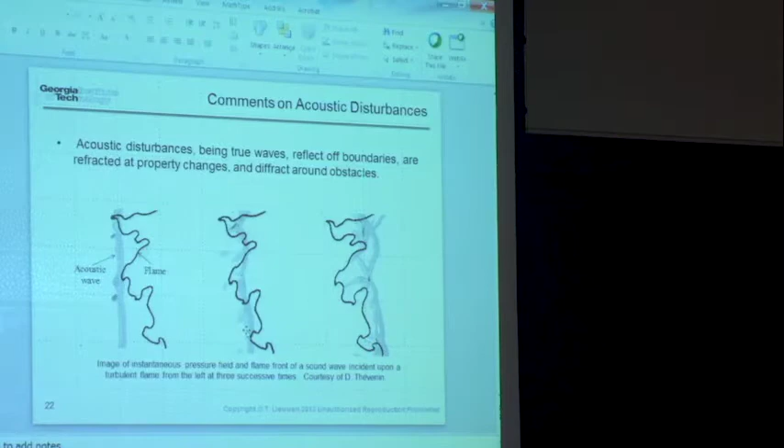Another observation: acoustic disturbances are interesting because they're true waves. What do waves do? Waves bounce off of things, they diffract around things, they refract through temperature gradients. For example, when waves bounce off of things - when I'm talking, the sound wave hits that wall and bounces off. That doesn't happen with entropy and vortical disturbances. There's no analog to reflection.

Similarly, diffraction: if one of you took your chair and sat outside the room around the corner, as long as I talk loud enough you'd still be able to hear me, because the sound bends - diffraction of sound.

Now, if any of you are taking Professor Hansen's class on optical diagnostics, in many cases if the wavelength is really small you move into what's called the geometric optics or geometric wave limit. In that case you only get along the line of sight - if I took a flashlight and you sat around the corner, you wouldn't be able to see it because the light wouldn't bend around. That's because the wavelength is really, really small relative to the size of the door. But that's a good approximation for electromagnetic waves.

Usually acoustic waves are in the opposite limit, where everything diffracts, everything bends. In fact, if I turned around and faced the wall, you'd be able to hear me almost just as well as if I faced you, because the sound is just wrapping around and bending around everything.

And again, there's no analog to that for vortical or entropy disturbances. If I generate a vortical disturbance, the only way you're going to see it is if the flow carries it from me to you. If the flow is going somewhere else and you're over there, you're not going to see the vortical disturbance. In contrast, the acoustic wave is going everywhere, and you can see it.

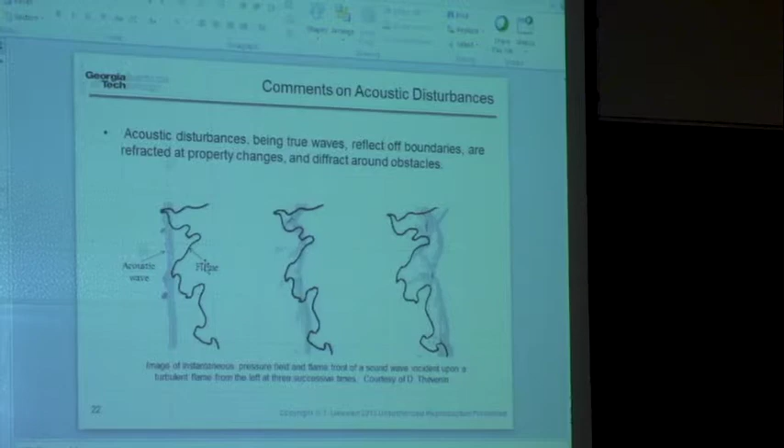This has important implications for the combustion instability problem, because you have all these disturbances, and when they interact with the flame, they're amplifying it and generating lots of fluctuations in vorticity, entropy, and sound. But these vortical and entropy disturbances actually just keep getting spat out of the combustor - they're flushing out. Whereas the sound wave, when it hits the exit of your combustor, turns out the exit is a really efficient reflector - most of the energy just reflects right back, and very little energy leaves the end of the system.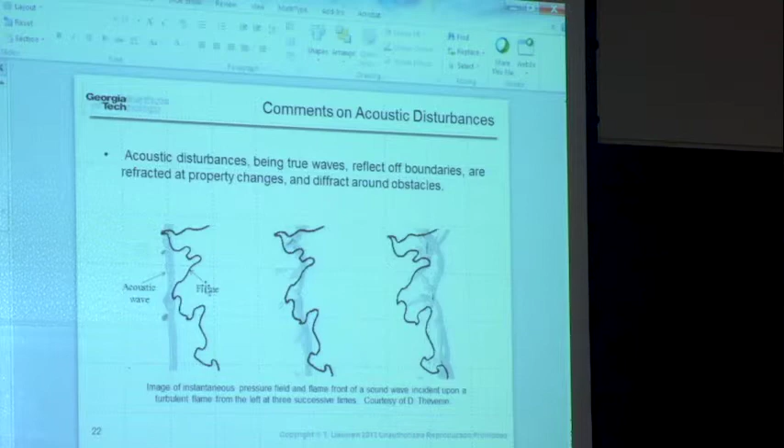And so that's why we have thermoacoustic instabilities as opposed to thermoentropic instabilities - you don't normally think about those, because you don't get the feedback. With acoustics, it hits something and comes back.

Question: but with entropy waves, as you have density gradients or spots that come back through the nozzle where you have flow acceleration, that generates pressure waves that then... Yeah, you're absolutely right - I was going to get to that later.

So you're adding a very important caveat. So...

When you start relaxing some of the assumptions I'm making, entropy disturbances, as they convect through a nozzle, when you accelerate an entropy disturbance, that does generate a pressure fluctuation which comes back. And that leads to something called an entropy mode. Absolutely correct, I was going to get to that. I was just trying, but you caught me oversimplifying things.

I'm glad you're paying attention. But still, the general point is that the entropy mode goes away, but as the entropy mode washes out of the combustor, it actually generates an acoustic fluctuation which comes back, in the example that was just mentioned. The key part of that, though, is you have to have a flow acceleration. If you just have an open end of a tube, the entropy disturbance just washes out.

I'm going to go a little long, if that's okay with everybody. Sure it is, because I just want to finish my point.

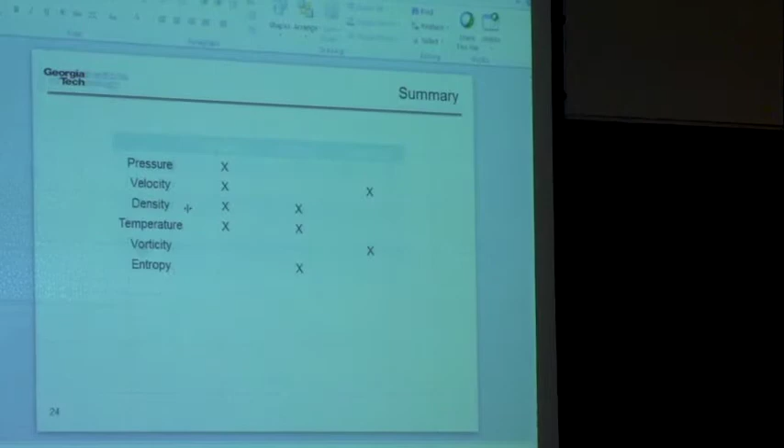I want to do an example. I want to think about, all right, we've talked about how you have these, well, let me jump ahead. Where's that slide? Where'd it go? This slide summarizes everything we just talked about. So if all the math just shot over your head because you're sleepy or watching football, pay attention to this slide.

Because what it says is, now I filled in all the X's. These are my physical manifestations, and these are the fundamental disturbance modes. How are these fundamental disturbance modes manifested? Well, the acoustic mode is manifested as fluctuations in pressure, velocity, temperature, and density. The entropy mode is manifested as fluctuations in density, temperature, and entropy. The vorticity mode by velocity and vorticity.

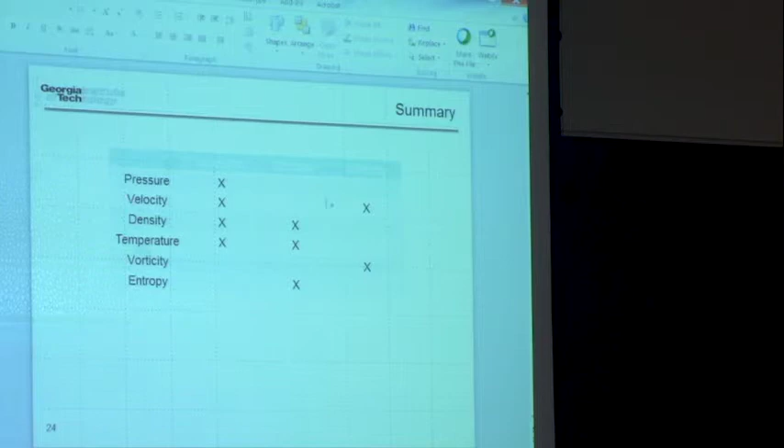So for example, if you look at something like velocity, now I just read it vertically, let's read it horizontally. When you make a velocity measurement, you are actually looking at the superposition of an acoustic wave moving with the speed of sound and a vorticity wave moving with the flow. So if you just have a single point measurement, you have no way of differentiating between those. If you have a 2-point measurement, you can actually sleuth out what you have there, because you can do a cross correlation between the two and figure out, okay, actually 40% of that velocity fluctuation was a sound wave zinging by at the speed of sound, whereas 60% was a vortical disturbance just plodding by with the flow.

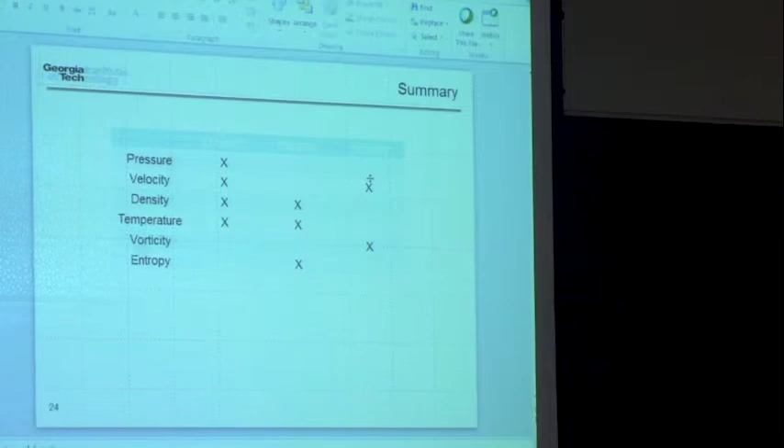Same thing happens with the density, but slightly differently. So if you have a fluctuation in density, for example, you're making some sort of absorption measurement, what you're looking at is a superposition of— by the way, the temperature is the same, so let's talk about density and temperature at the same time— that is a superposition of an acoustic disturbance and an entropy disturbance.

All right, so let me do an example here and then we'll take a break. So let's look at a real simple model problem. We said the unsteady velocity is a superposition of the acoustic mode and the vortical mode.

Let's think about what you would actually measure if I had an acoustic disturbance which was oscillating harmonically and moving with the speed of sound. So this would represent an acoustic disturbance with an amplitude A lambda, moving in the direction of positive x with the speed of sound c naught. That's what this physically describes, a traveling wave with that amplitude. This here, A omega, is the amplitude of the vortical disturbance, moving with the mean flow speed. So acoustic amplitude, vortical amplitude, moving with the speed of sound, moving with the flow.

Just to keep things real nice and simple, let's assume the amplitudes of the two are equal. So I have an acoustic mode and a vortical mode, same amplitudes, all right? Now I can just use trigonometric identities and add those up, and this is what I'm going to get. So a measurement in velocity would look like this, okay?

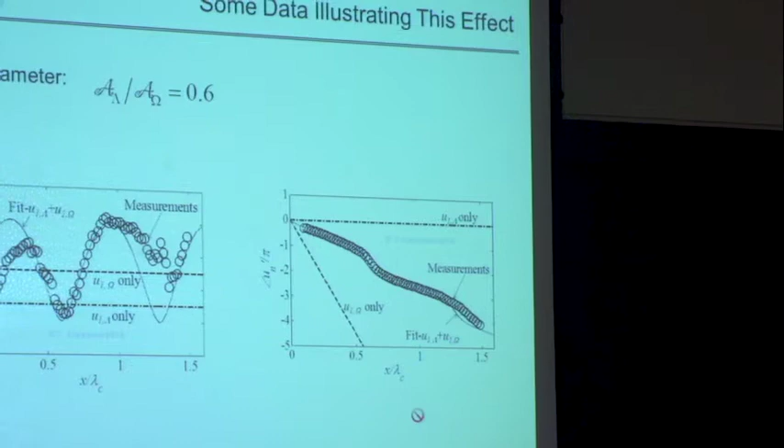Well, what I did here was I'm going to show you data as well. This corresponds to a situation where the two don't have the same amplitude, but the acoustic mode is 60% of the vortical mode. Now, if you take this type of expression and plot what that looks like, if this is the unsteady velocity magnitude, I'm not plotting the instantaneous velocity, but saying the velocity is oscillating harmonically at omega t. What's the amplitude of that oscillation at each spatial position?

It looks like that. That's the solid line. So the U prime is U minus U bar? Yeah, yep. And this is amplitude, that's why I have the magnitude around it. So in other words, what that says is that at this point, it's oscillating harmonically at omega t with 8% of the mean, whereas this location, it's 4% of the mean.

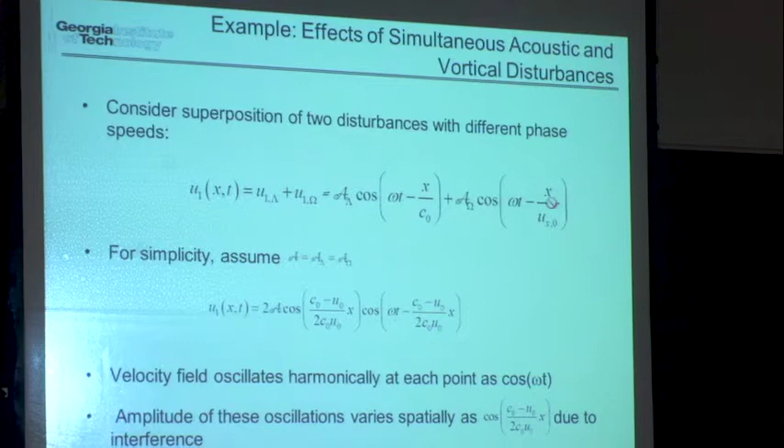But what's interesting is if you just measured the vortical disturbance, it has a constant amplitude in space. In other words, going back to my expression, the amplitude of the vortical disturbance has no spatial dependence. There's a phase that varies spatially, but it's a times cosine omega t plus a phase. Same with the acoustic disturbance - it does not have an amplitude that varies spatially. It's a times cosine omega t plus the phase. So if you only had an acoustic disturbance, you would measure a constant amplitude with space. If you only had a vortical disturbance, you'd have a constant amplitude that doesn't vary in space.

You have a superposition of the two, and you get basically an interference pattern. You've all seen interference patterns before. But what's happening is that the two are moving at different phase speeds. At some points, they're in phase with each other - one's at amplitude A1, the other's at amplitude A2. If they're in phase, I'm going to see A1 plus A2. Now, at another point, they're going to be 180 degrees out of phase with each other because they're not moving at the same speed. There, the amplitude would be A1 minus A2. So you basically set up a standing wave or an interference pattern.

And we measure these all the time in combustion chambers when we have thermoacoustic instability. So let me jump back to a slide that I skipped over, this one right here. This was some data taken by Jackie O'Connor, she's a professor at Penn State. What she did was there's a flow going left to right, so you have reactants coming out of this annular flow passage. This turns out to be a swirling flow. This is a cross section.

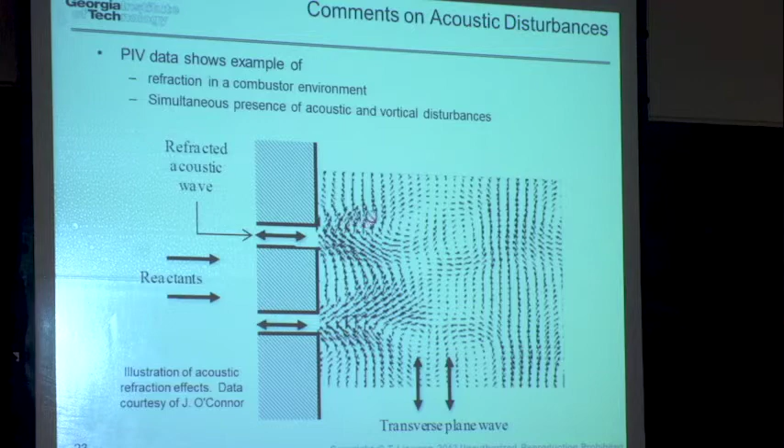And she introduced acoustic waves that were bouncing up and down. So what you have, and what those also do, is when they interact with the separating shear layers here, you excite a vortical disturbance. So what you have is an acoustic disturbance that really has no amplitude variation in this direction, and you have a vortical disturbance that's convecting in this direction. And when she went in with PIV and measured the amplitude of the velocity fluctuations here, or here, or here, or here, she got this behavior.

Those are those measurements. So initially when we looked at it, we said, what is going on? But quickly we put this together and realized, well, what we're looking at is we're measuring the velocity, but in reality the velocity is a superposition of these two canonical disturbances. Similarly, the phase - if you look at the phase, if you only have the vortical part, it would look like this as a function of distance. Only acoustics, it looks like that, but the measurement looks like that. And that very simple model problem really nails it.

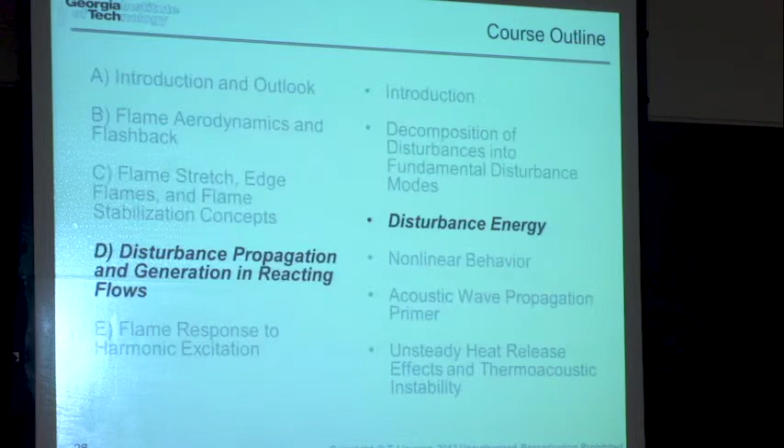Okay. Tell you what, I'm just really going to impinge on your time because I have so much to say. I want to, in one slide, talk about what happens if I relax all those assumptions now, okay?

Remember we said we assume linearity, we assume a homogeneous flow field, etc. And within those approximations, the equations were sourceless, so the amplitudes, once you excite them, don't change in space. They stay constant - they just convect or propagate with the sound wave. They're also independent of each other. Now,

Those modes will start to couple with each other, but also change their amplitudes when you start including some things. So first of all, boundaries. You have a question? Okay, so boundaries. So think about it.

If I have a sound wave impinging on a wall, it may be that in the domain, the acoustic and vortical disturbances are independent of each other, but at the wall, you don't apply the no-penetration boundary condition separately to each mode. The unsteady velocity normal to that wall is 0, and the unsteady velocity tangent to that wall is 0. So what happens is those modes actually couple with each other, because at the wall, U1 omega plus U1 lambda, whatever, is equal to 0.

So for example, no vorticity at the wall right now. As I'm talking, that sound bounces off that wall, and at the wall the velocity's got to be 0. So what that does is the sound wave actually excites a vortical boundary layer at that wall because of the sound wave hitting it. So the modes are coupling at the wall.

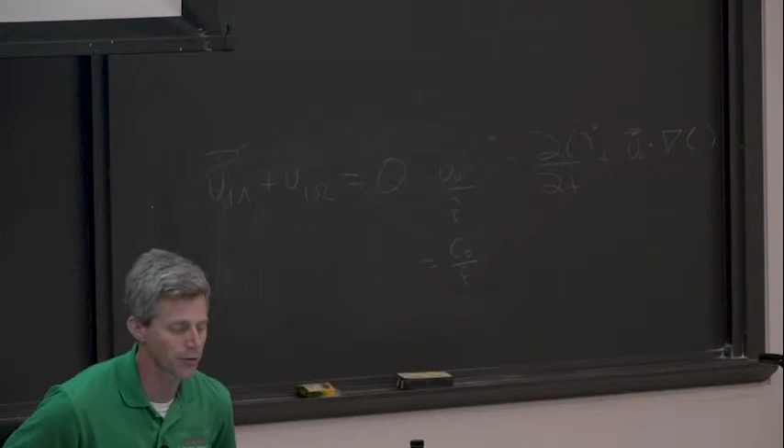How does this manifest itself? We call that acoustic damping. You may have heard of acoustic damping at boundaries, but really what's happening is energy is moving around between different modes. Overall, the energy is conserved in the disturbances, but the energy is moving from the acoustic wave, which moves with the speed of sound, to the vortical wave. So what that wall does is provide a mechanism whereby a disturbance that propagates with the speed of sound, is compressible, and is irrotational, can pump a little bit of energy into a disturbance that moves with the flow, that is rotational and incompressible.

In the domain, there's no way those two modes can match with each other, subject to the linearity and homogeneity approximation. But at the wall, there's a mechanism for that to happen. So what happens is the acoustic wave, when it reflects off that wall, reflects with a slightly smaller amplitude than it started from, because some of its energy went into a vortical disturbance. Same reason some of its energy will go into an entropy disturbance. So that's one effect: boundaries.

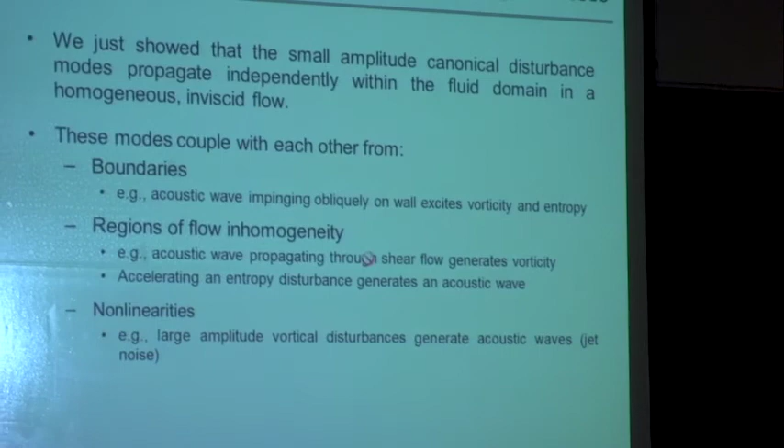The next is regions of flow inhomogeneity. Let's think about what happens if we relax the assumption that there's no spatial variations in mean pressure or mean density or things like that. It turns out that when, for example, a sound wave propagates through a temperature gradient, it generates vorticity. So the modes start to couple with each other.

This is the comment that was just made: when you take an entropy disturbance and you run it through a region of inhomogeneous velocity, i.e. you accelerate it, you generate an acoustic wave. That was the comment just made, that when you take an entropy disturbance and run it through a nozzle, you actually generate an acoustic wave. So the two modes couple. There's a whole bunch of other examples, but in regions of flow inhomogeneity, all the modes start talking to each other and interacting with each other.

And then finally, there's nonlinearity. I gave the example of vortical disturbances, that when you have a vortex—remember I said, why is the pressure fluctuation 0? We all know that vortical disturbances, that vorticity, creates pressure disturbances. Well, that's a nonlinear effect. So to second order, the vortical disturbance excites pressure disturbances.

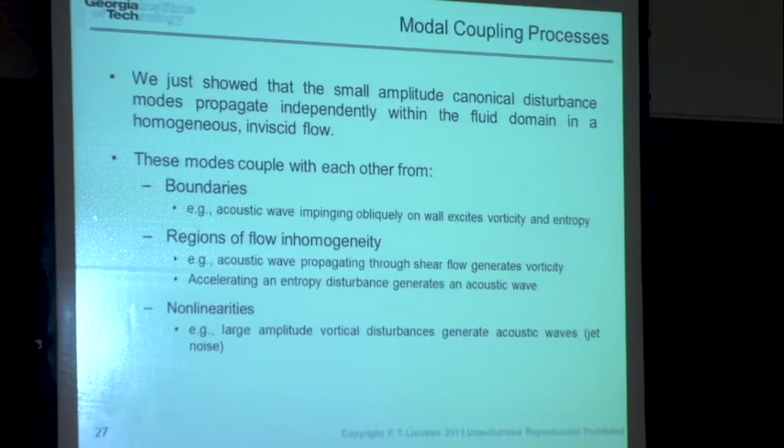And that's actually how jet noise gets generated. If you've ever wondered why a high velocity jet like an aircraft engine generates sound, it's through a nonlinear mechanism whereby you have these turbulent vortical disturbances, and because of nonlinearities, a little bit of the energy in those turbulent vortical disturbances gets transferred into the acoustic mode, and the acoustic mode propagates away at the speed of sound. The vortical disturbances just convect with the flow.

And all of this stuff is happening in combustion systems, all right? You have sound waves getting generated by the flames, bouncing off of walls. When the sound waves interact with the flame, they generate vorticity and entropy because of this effect. And then those vorticity and entropy modes convect downstream. When you have an entropy disturbance or a vortical disturbance, they interact with the flame, they generate sound.

So all the modes basically get mixed and jumbled and matched and moved around when you propagate through the flames. But then once you're downstream of the flame, it's kind of homogeneous, and then you can use the analysis we used to this point. But then when you hit the nozzle, the assumptions break down, and they start talking to each other and interacting with each other again.